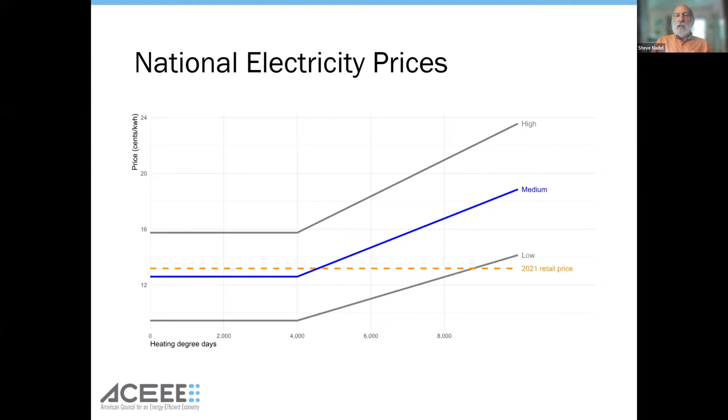Another adjustment we made: north of 4,000 heating degree days, which is roughly Maryland on north, we added more for winter peak demand to meet the increased need for power based on heat pumps. We have our low, medium, and high price scenarios. Most of what we'll be discussing is the medium.

And likewise for gas prices, again we have home-specific prices, but we adjusted them for changes from EIA. At the far left, you can see what EIA says is the national residential retail price. Towards the middle, we looked at 2040 prices, which they project would be very similar for fossil gas. But then to that we added how much more it will cost for biogas and green hydrogen, and also if many people switch to electric heat pumps, what that will do to distribution charges. You can see here that instead of costing maybe just over $10 per million BTUs, in our medium case the alternative gas, counting both the fuel and distribution charges, is nearly $40 - more than a factor of 3 higher than present prices.

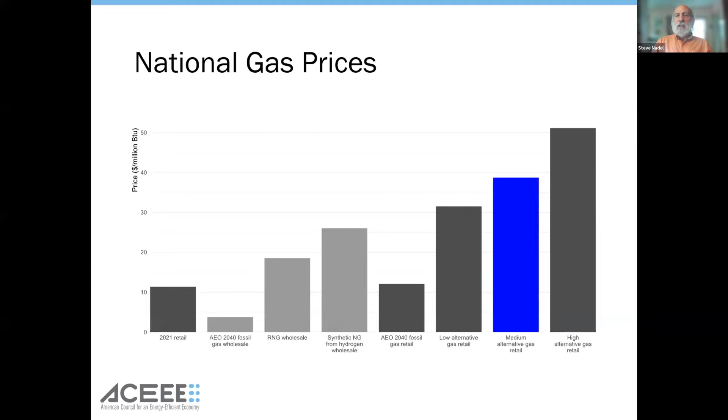Some other key assumptions come from equipment costs - I won't read them all, but those are where some of them come from. We use an 18-year equipment life for space heating, 13 years for water heaters, and a 5% real discount rate to discount future expenditures to the present.

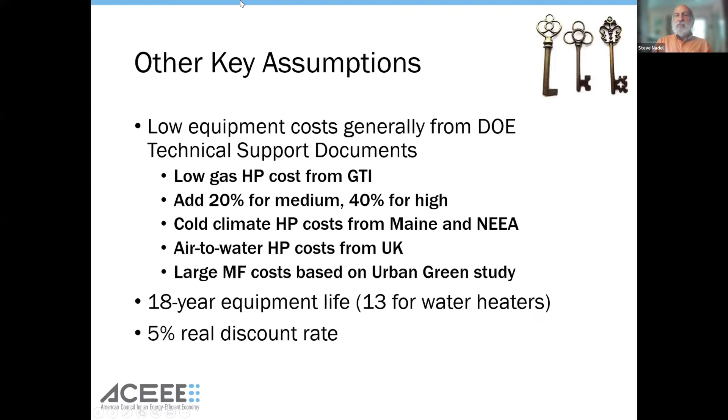One of the key variables we used is heating degree days. This is a map showing average heating degree days in the US from 2006 to 2020. We'll particularly be focusing on the 4,000 heating degree day line, roughly at the Ohio-Kentucky boundary or the Washington D.C.-Maryland boundary, and we'll also look at the 6,000 heating degree day line, just south of Detroit, or the line between Boston, which is below 6,000 heating degree days, and Worcester, Massachusetts, which is above.

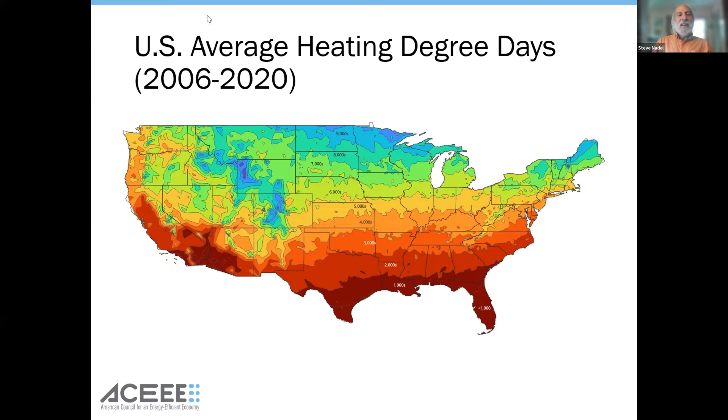Thanks, Steve. So this is looking at our actual results here. This is about 2,000 homes that used gas furnaces in RECS 2015. Each home appears twice, once as a blue square and once as a pink diamond: once for when we analyzed it with the electric heat pump, and once for the gas furnace.

It's great to see all the data points here. You can see the exceptions to the trend, outliers out here, but it's hard to process that with four different options. So for many of our figures, we only have the best fit lines showing the correlation between heating degree days and life cycle cost. The other thing I'll draw your attention to is this gap in the electric heat pump lines, which is the increase in cost for cold climate heat pumps starting at 4,000 heating degree days.

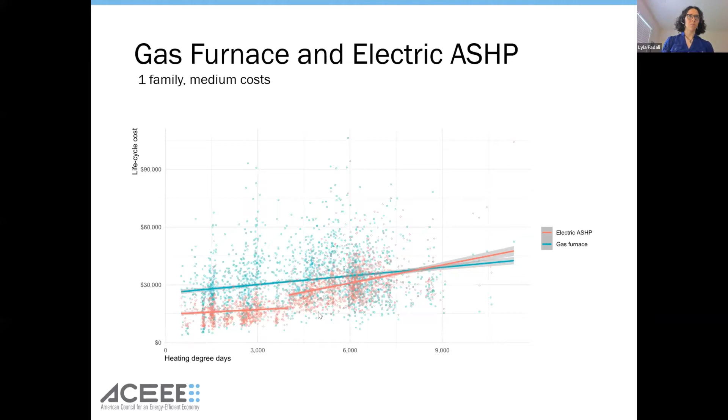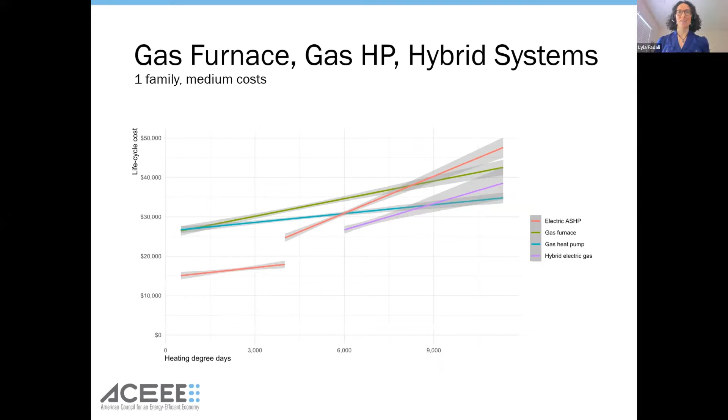Considering the results: you can see that below about 6,000 heating degree days, we found that generally electric air source heat pumps were the lowest cost option. Above that, hybrid systems with a gas backup below 5 degrees Fahrenheit were the lowest cost option. Out here we have gas heat pumps, but those are based on only 5 different homes, so I'd take that with a couple of tablespoons of salt.

We considered how the results would vary with different levels of prices for electricity and gas. Our main analysis was the central square here. You can see if we used high gas prices instead, then only in the very coldest places would the gas heat pump edge out the electric heat pump. If, on the other hand, you use low gas prices, it would shift over a bit. But basically we have the same picture for all of these, where the electric air source heat pump was the lowest cost option, just depending on where that line was drawn.

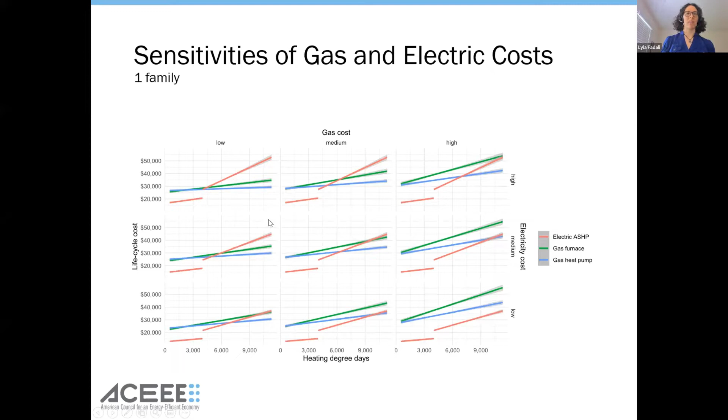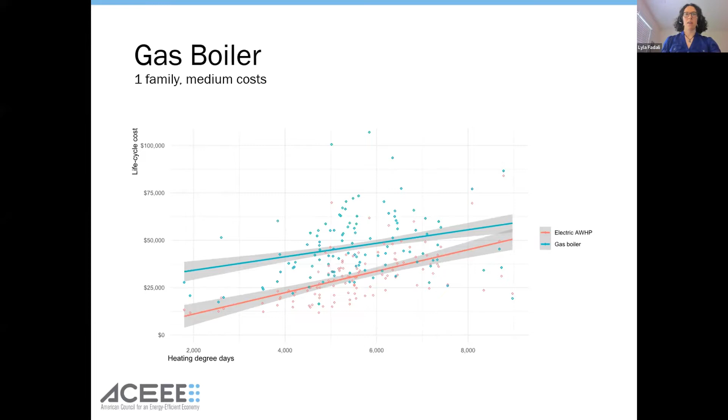Considering the effect of energy efficiency, readjust your mind here. These are all lines for electric air source heat pumps, but just with different energy efficiency options for the home. You can see that below about 4,000 heating degree days, we found that energy efficiency did not really pay out, but in colder areas, shaving off some of that winter peak was well worthwhile.

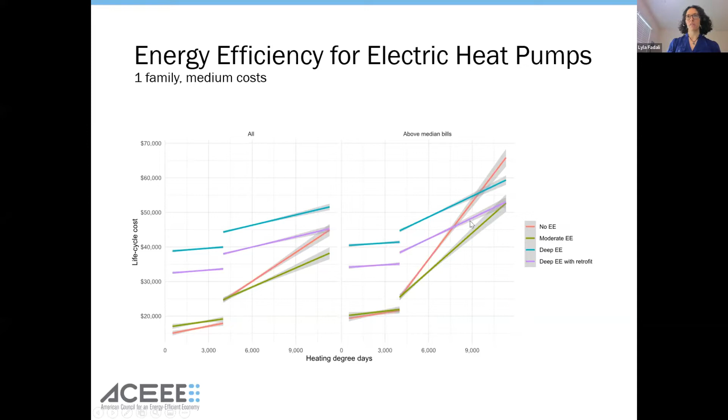We separately considered the half of homes that had space conditioning bills above the median, and you can see it's more favorable in these circumstances, including in colder places. Our deep retrofit package, which achieved 60% energy savings but had pretty substantial cost, came in better, looking better than the no efficiency option for colder climates.

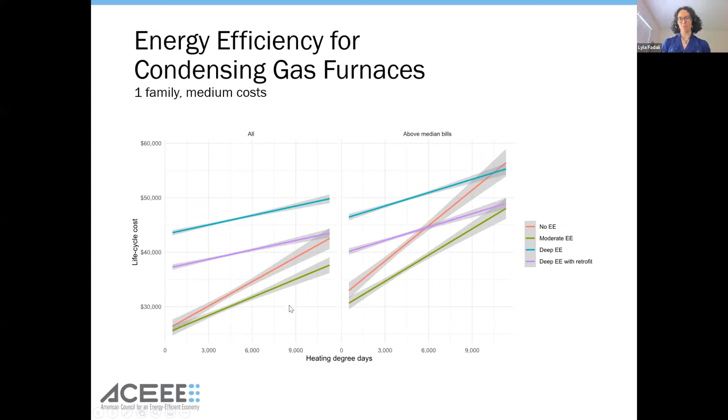This is the same thing for condensing gas furnaces. It actually looks even a little bit better than it does for the electric heat pumps. Those alternative fuels are very expensive, so using less of them makes them a bit more competitive.

We separately considered gas furnaces for 2 to 4 family buildings and 5 or more family buildings. Generally similar results to what we found for single family. Here for 5 or more units, you can see that below 4,000 heating degree days, the purely electric heat pump was the lowest cost option, probably above 6,000 heating degree days, the hybrid was the lowest cost option.

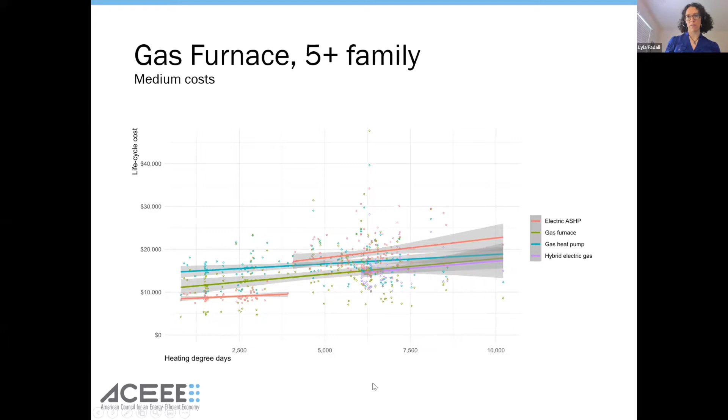In between, we found there could perhaps be an opportunity for gas furnaces, though I will note this is a smaller sample size than others. Gas boilers, central gas boiler, large multifamily buildings with central gas boilers were kind of the exception to our rule. You can see our electric options here, the electric VRF and mini split heat pumps up top.

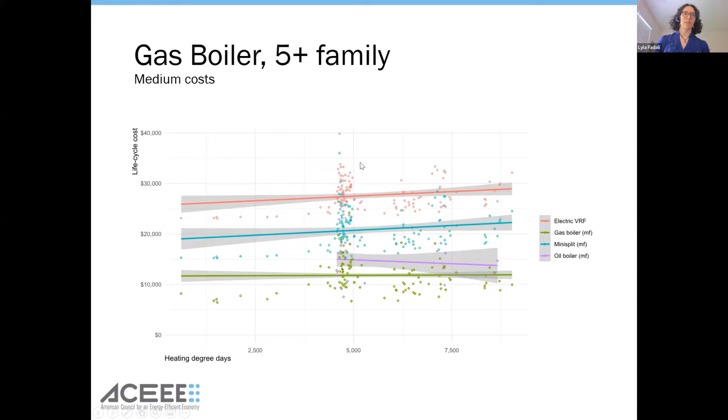We modeled very high cost for electrification in these buildings. We did also consider what it would be like if we used the same installation costs, the same equipment costs as for single family homes, and that brought the mini splits down to a level sort of competitive with the gas boilers. But I will leave it to others to speak to the challenge of bringing those costs down.

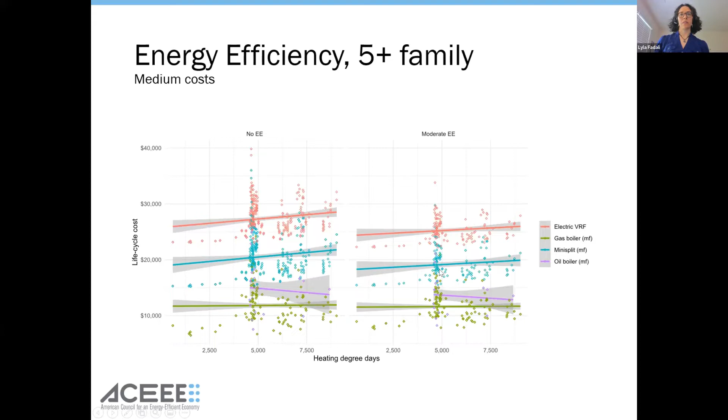Considering the effect of energy efficiency here, you can see it doesn't much change the results for the gas and oil boilers using alternative fuels. It does significantly bring down the cost of electrification, but not really enough to change the results here.

Considering water heating, these box plots are showing the line as the median, and the boxes are the first and third quartiles. You can see the electric heat pump water heaters have by far the lowest cost of all these options. But what you maybe can't tell in this figure is that these outliers correspond to outliers for the other system types. So in fact, for every single home that we analyzed, the electric heat pump water heater had the lowest cost.

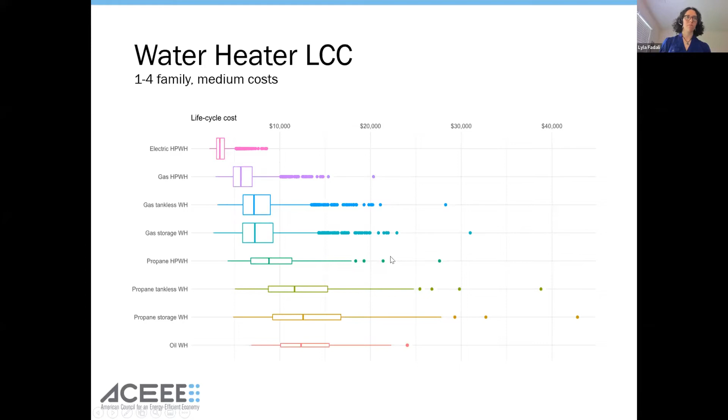For everything I've talked about up to this point, the homes were just homes, not representing anything, but RECS is meant to be a nationally representative sample of homes, and EIA has weighting factors that you can use to make the full data set represent the national housing stock. So we did that for these 8 different scenarios, each scenario kind of built on the last one, like scenario 5 is scenario 4 with some additional assumptions.

Basically, those assumptions are a summary of the results that I was talking about up to this point. You put them all together, then our lowest cost option was this last one. I can't really spend more time on it than that, but these slides will be available after the webinar, and these are all figures from the report.

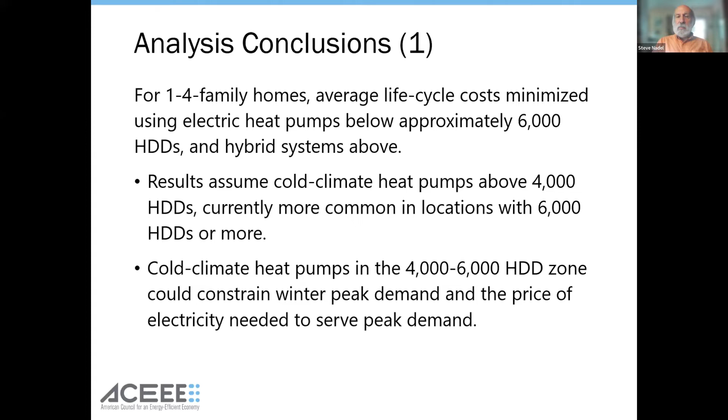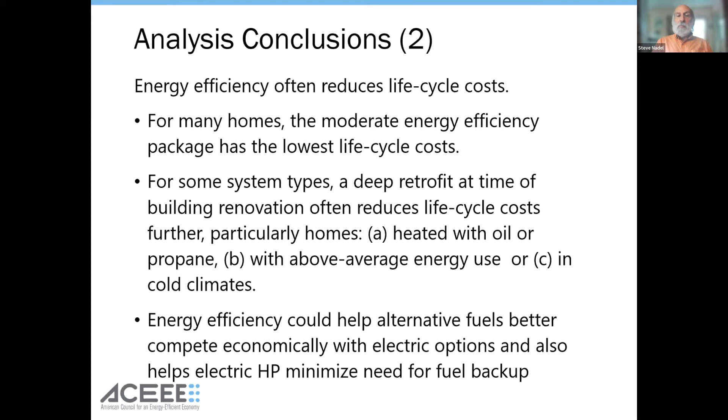And I would note that the efficiency both helps reduce the winter peak and helps people be comfortable in cold temperatures, and also in the case of a fuel, helps minimize the amount of fuel because the fuel is quite expensive.

Next, multifamily buildings. As Leila pointed out, for buildings with warm air heating with furnaces, results are fairly similar to single family. But if you have a boiler, a central boiler, the costs of retrofitting with air source heat pumps is quite high.

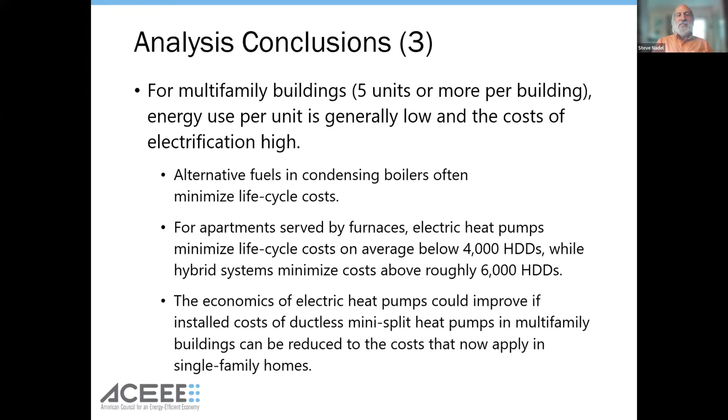And we found that it will often be cheaper to do a condensing boiler with a decarbonized fuel. But Anne may comment on that. The data is very limited. And next.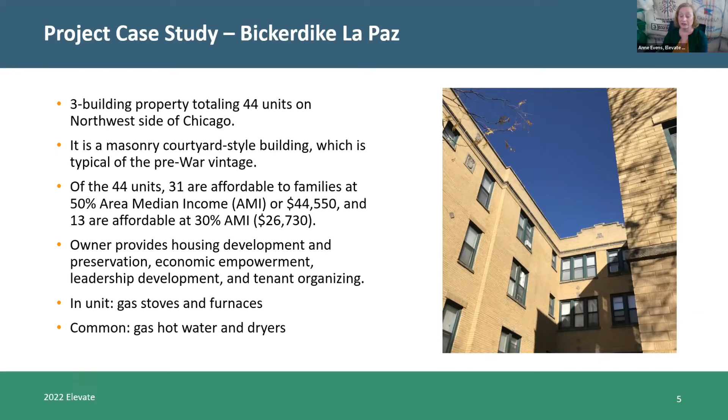The owner also shares some sustainability and climate goals. So in the unit, we had gas stoves and gas furnaces. In common areas, we had gas hot water heaters and gas-fired clothes dryers. The approach we took to upgrade this building—again, with systems that were end of life—was to convert space heating to heat pumps, water heating to heat pumps, and appliances to all electric sources.

We made the decision not to use induction stoves, and I'm happy to jump into that if there are questions. I think I saw a question related to the need to upgrade electrical service to support these newly added electrical loads, and that was required both for common area accounts and individual units—a substantial cost. I think this speaks to the costly nature of some of these retrofits.

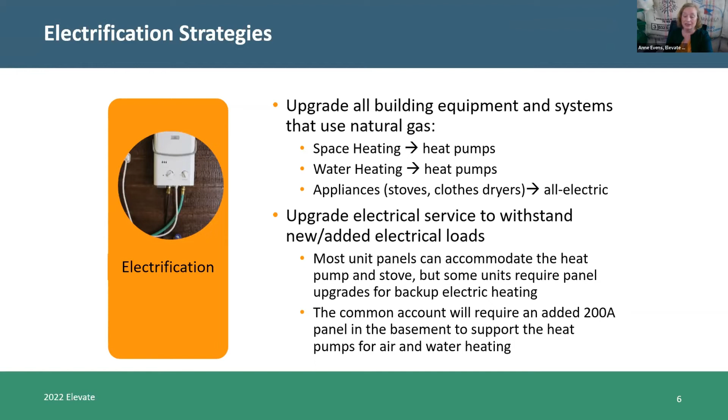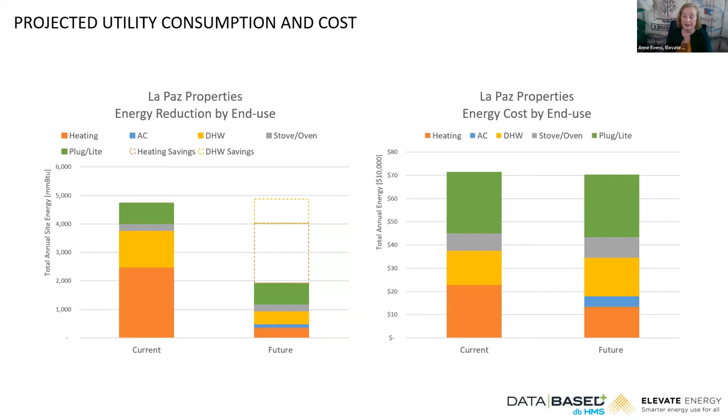This slide shows you on the left pre and post energy consumption by end use, and on the right pre and post cost by end use. You can see the energy consumption, or EUI, of the building overall goes significantly down, but costs—utility costs—are about the same. We took the principle of making sure that the options we provided would reduce utility costs for tenants.

And I promise this is my last slide, so we can move to questions. On the left, we showed utility costs pre-baseline for both common area, in orange, and tenants, in green, and post common area. You see the common area costs go up—that's because of the DHW, domestic hot water use—and tenant costs go down. We are adding rooftop solar to this project as well to address the increase in common area costs.

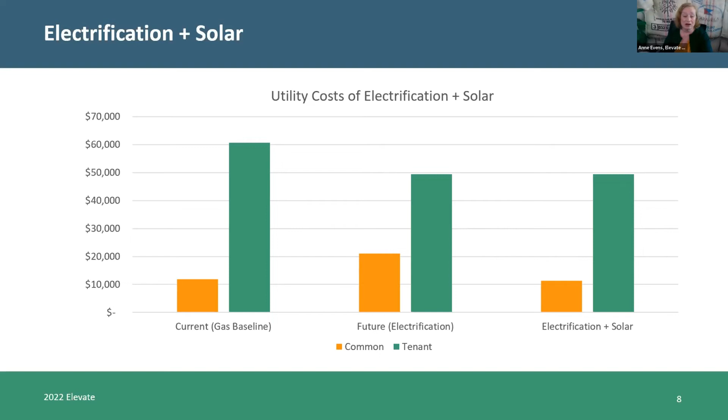We did a lot of tenant engagement as part of this project, and the most significant driver for tenants was, one, going from having 2 utility bills to manage down to only 1. But even more important for them was the addition of cooling. This building did not have cooling prior to the upgrade, and I think we cannot underestimate the value of providing cooling as we continue to experience these extreme heat events. With that, Steve, I'll pass it back to you and look forward to answering questions.